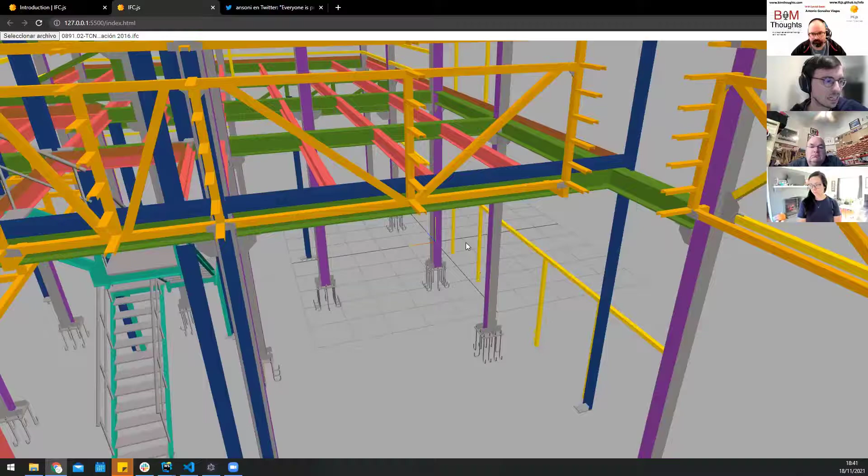Basically, this uses the same technology as Forge uses. So in the end, the possibilities are endless because we're giving people a 3D viewer that is able to import, export, and edit BIM data. We are giving them the tools to edit that data. And because I'm in the web, in JavaScript, I can simply use HTML and CSS.

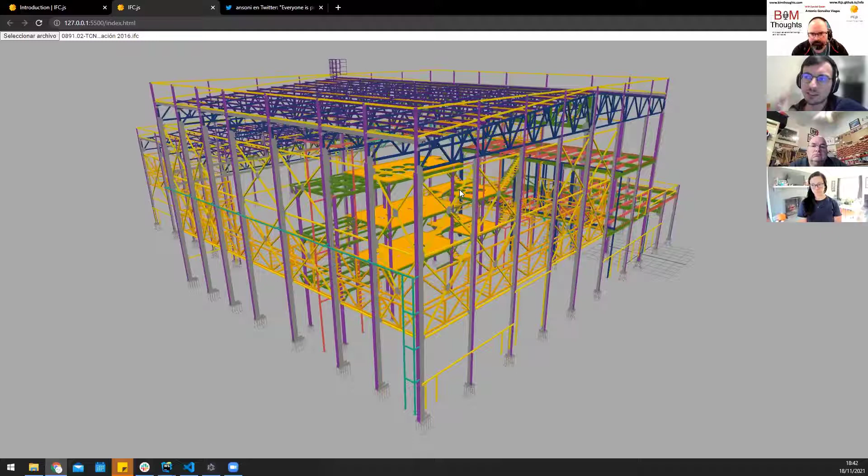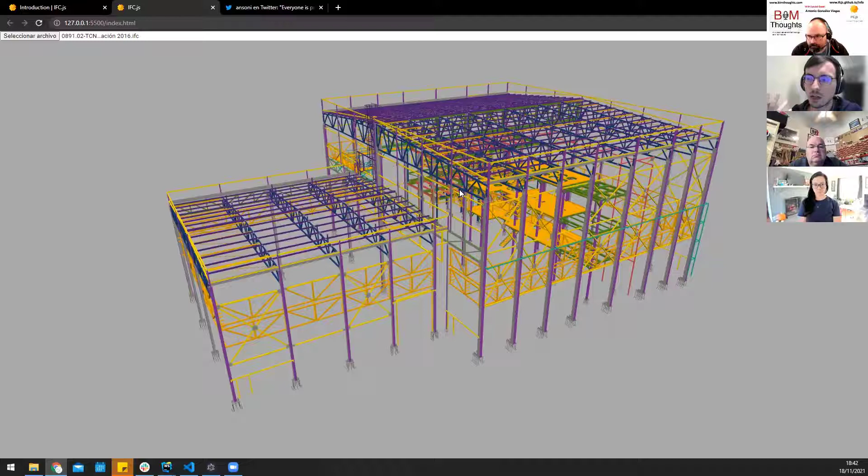This is also compatible with more sophisticated tools - I don't want to get too technical - but you can use this with other tools like React, Angular, Vue. Just before the podcast today, I was experimenting with Electron, a JavaScript tool that converts JavaScript code into native code, meaning the same 20 lines I have here can be used to create a desktop application compiled for Windows, Mac, and Linux.

This isn't finished yet, but I have it here - a super simple desktop application executed natively in Windows. So I can click here, let's choose another file, and have all the things the library provides, like clipping planes, 3D dimensions, and properties.

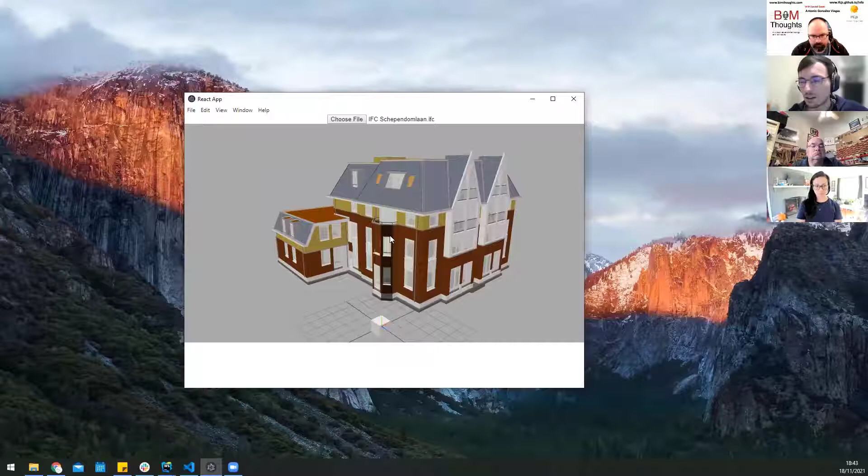That is growing - we are providing more and more functionalities. So hopefully, our goal is that if tomorrow one architect who perhaps doesn't like designing or constructing buildings very much is able to say, okay, I want to do this for a living. I want to create BIM tools because that's what I like - I like video games, I like programming, perhaps I like computers more than buildings, and this is what I want to specialize in.

This is basically the piece you need to create your own BIM applications. And this is super important because all the applications you create with IFC.js belong to you. You can sell products using this. It's literally like giving everyone the key to get into the BIM software market.

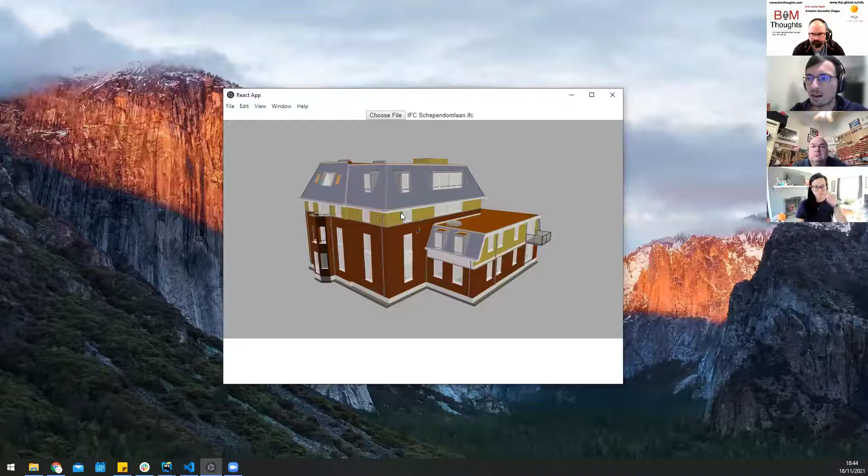We are all aware that opinions about some of the big BIM software companies are not very good. We had this complaint letter not very long ago. So the question is, criticizing is easy, but now you have the tools to actually say, I can do it better than them, because they get a lot of money.

They don't develop quick enough, they don't deliver features quick enough. Perhaps it's time to actually do this ourselves. Even though this might sound naive, I've had a lot of meetings with big companies, supermarket companies paying hundreds, thousands, or even millions of dollars a year to use Autodesk Forge to manage their assets. And in the end, they say, we know we don't get what we want using Forge. We wish there was another way to manage our BIM assets without relying on this abusive license system.

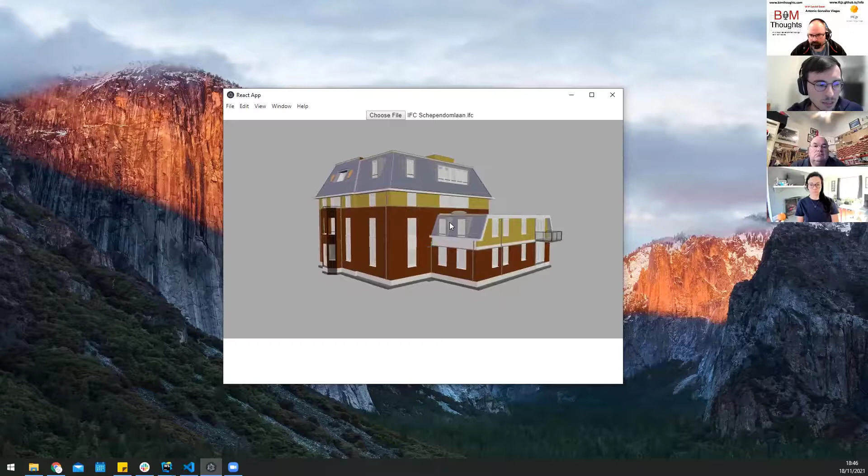This kind of technology allows these companies to build their own applications, which is what happens in literally any other field in the company. For instance, if a company isn't happy with the software available for staff management, salary management, or bill management, they can make their own software to handle their information. This enables them to do the same with BIM - if you don't want to pay another company to manage your assets, you can do it yourself very easily, very flawlessly.

Even though JavaScript has this reputation of not being the most efficient language, the core is built in C++, which means this technology has almost the same speed as native applications. If you take any application like BIM Vision and compare it to our IFC.js, the speed of loading big IFCs is very similar, with the difference that with IFC.js you're not only creating your own application, but you're also able to compile that to web, to desktop, and do whatever you want. Tomorrow, if I wanted, I could build my own BIM Vision and build a company out of that, or create my own CDE.

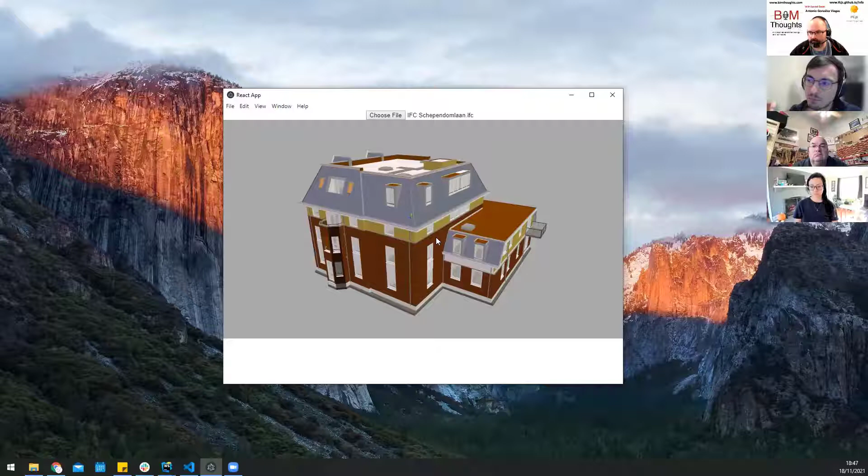For instance, one thing I did not long ago for a Building Smart presentation we were invited to - we created a super simple CDE system inside Google Drive. The idea was, okay, Google Drive has some... I'm saying CDE informally, I know there's a specification before you say anything, but this is just an example to show that it's really easy to get started building things that aren't just small scripts to make daily life easier. You can actually build applications - you can build anything you want.

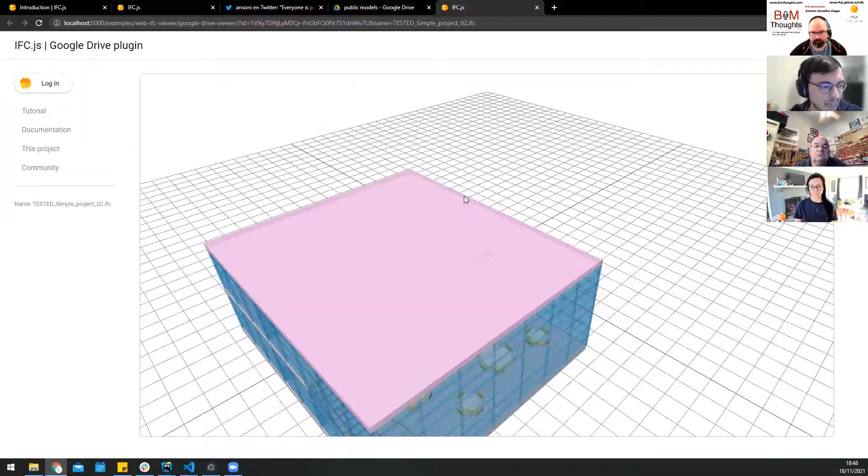For instance, if I go here, I get this super simple button. If I click there, it processes that file, downloads it using the Google API, and displays that here in the browser. I'm able to navigate that around. This is something anyone with access to that folder will be able to do, by installing a Google Chrome extension. The possibilities are endless.

Right now we have a Discord channel that's open, and there are a lot of companies building their own BIM software and commercializing that software on top of IFC.js. That's the goal - to populate the BIM software market with smaller players to be able to...

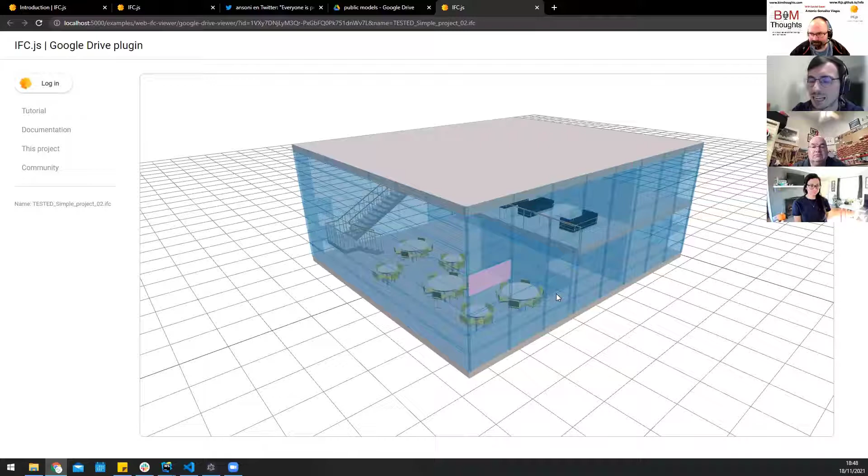Oh, it looks like you're back now. We lost you for a second, Antonio. Yeah, sorry - so did you see the Google Drive thing? We did, we saw that, and I think that's really cool. I remember seeing the process of voting to get the people who got to go to the Building Smart event to present their idea.

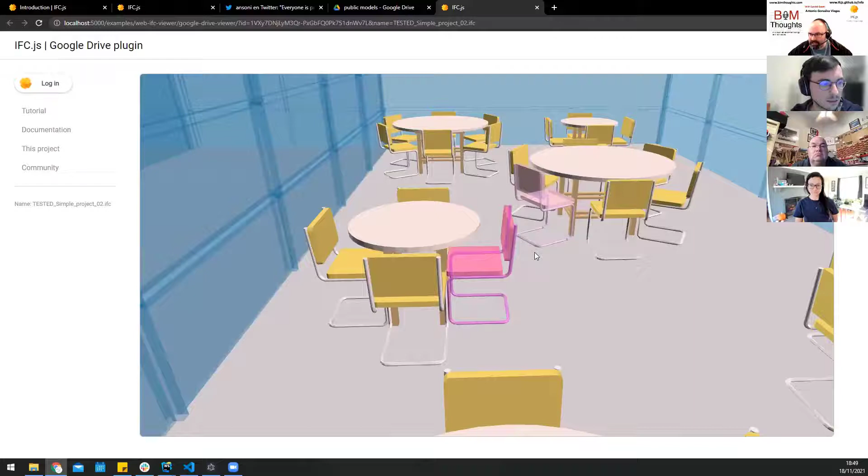The one thing I did want to ask - did you say this was an add-in through Chrome? Like it's the extension that's running the crude CDE? Yeah, in this specific case, this is a web application that I've deployed on GitHub for free, so it's just a regular web application. But to display this little guy here, I'm simply manipulating the HTML with reverse engineering with a Chrome extension. Yeah, it's basically it.

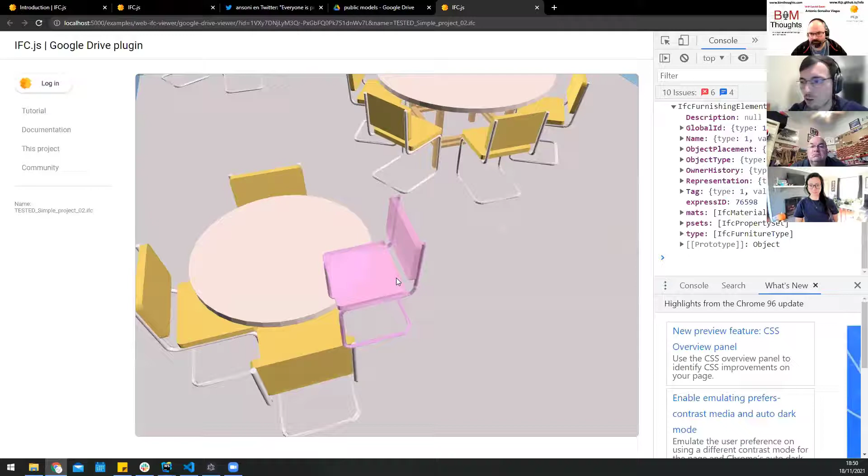In the end, the point is you can build BIM applications capable of accessing all the data, creating new data, editing existing data, building menus around it, and creating your own BIM commercial solution for free. Right now we believe one of the main problems of a lot of open source initiatives out there is that there's like 2 or 3 guys who are the authors of the library, and if they disappear or their life changes and they don't have as much time to put into the library, the project disappears because it's not future proof. You cannot promise that in 10 years you'll still be there solving issues.

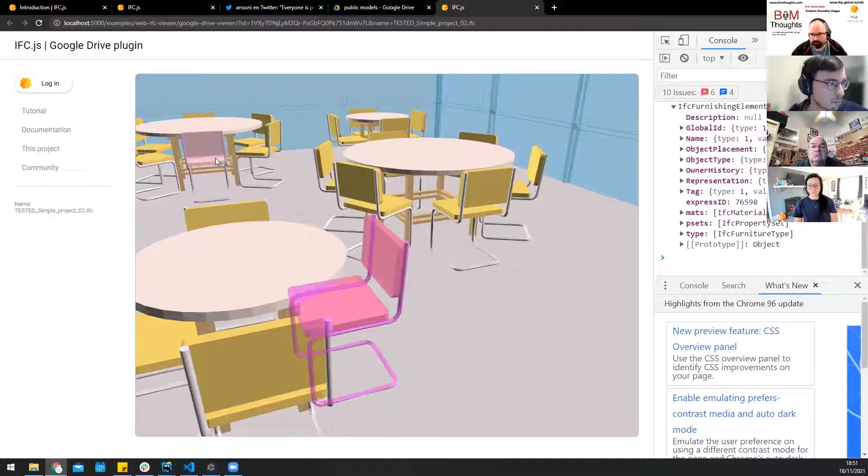So what we're doing right now is trying to make this project future proof. Even though it's very young - less than a year actually, I think serious development started in February, more or less - we've now come up with this system that's trying to involve companies. And it's super simple, right?

We are all trying to create BIM applications. And obviously, IFC.js is free. You can use it for free for commercial purposes forever. You don't have to quote us, even though we would appreciate it. It's not necessary. But IFC.js gives you the base, the template to create a BIM application, but probably you will need to add some logic to build your business.

If you put some of this effort back in the library, you get advantages, which basically is you get into the internal development team, you get a say in the direction of the project, and you get early access to new functionalities. With this system, we are trying to give a voice or power to those people or companies to contribute to the project.

So that in the future—right now we are talking with 3 or 4 companies, these are like the companies that join in the beginning. Some of them have thousands of employees, and they are super interested. My idea is that in the future, if there's like 20 companies involved, all of them will be putting effort back in the library, and all the companies and people that use the project will benefit from that effort.